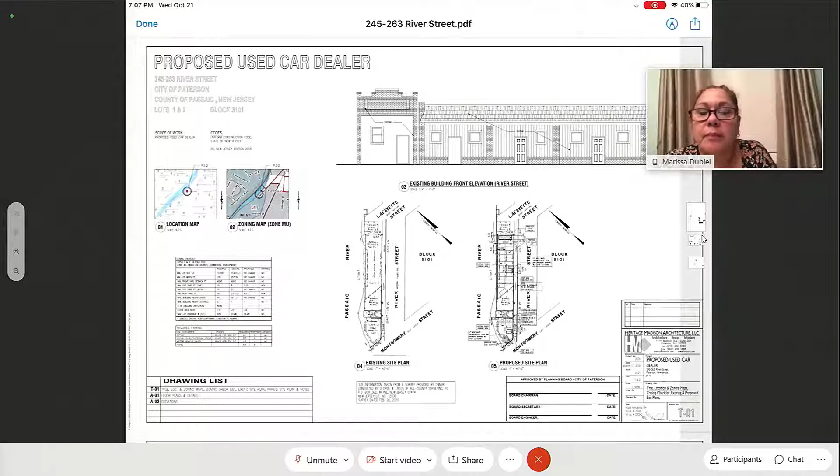How about now? Yes. Okay. Please, so I'm going to zoom into the existing site plan.

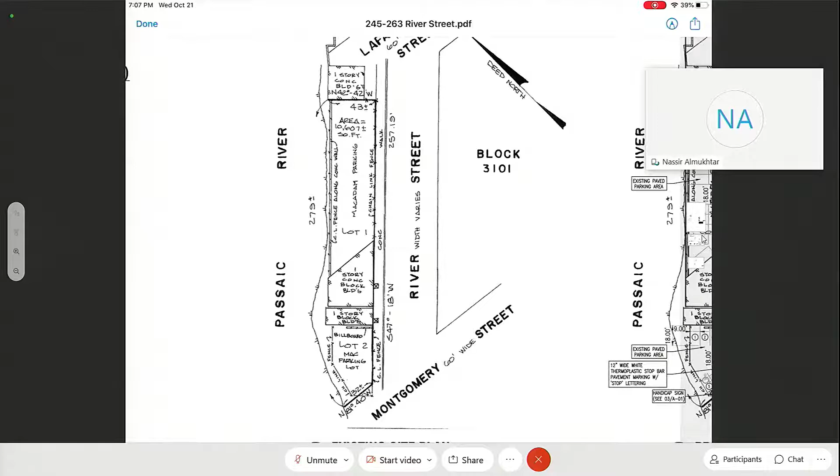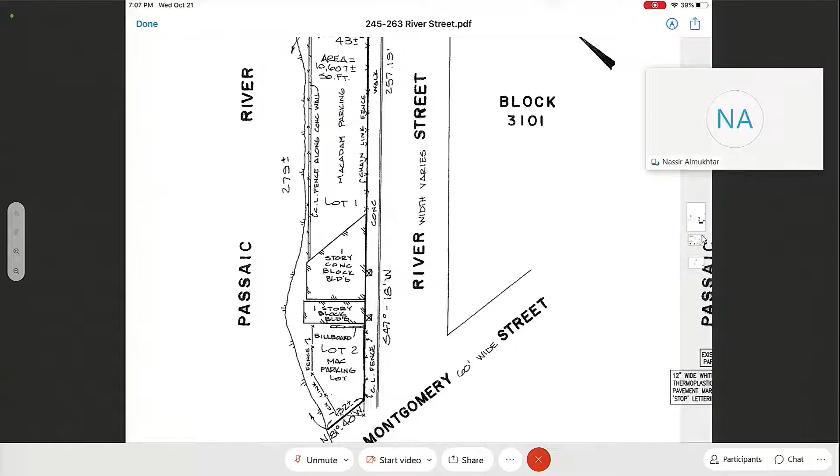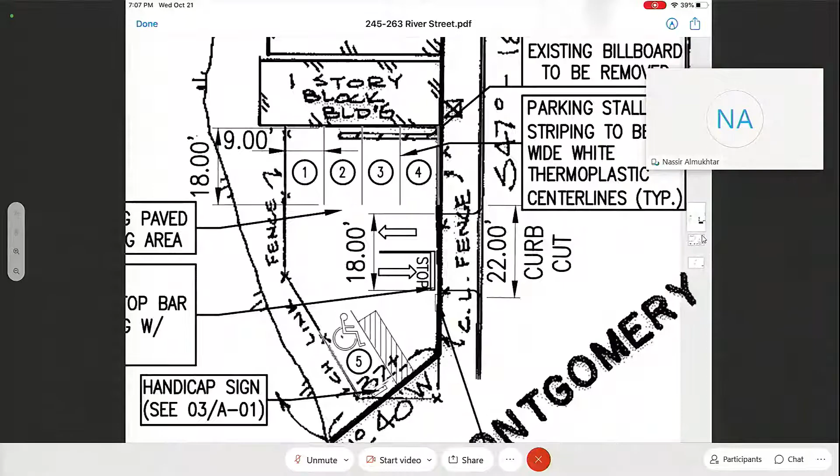This is the existing site plan. There's a billboard, and there's no curb cut to the south of the existing structure, the one-story block building. So we're proposing to provide a curb cut there and turn that space into a parking lot. This parking lot is indicated on this drawing, which would contain parking space number 5 for the handicap, and then to the north of that we have spaces 1, 2, 3, 4, and there would be a 22-foot wide curb cut there.

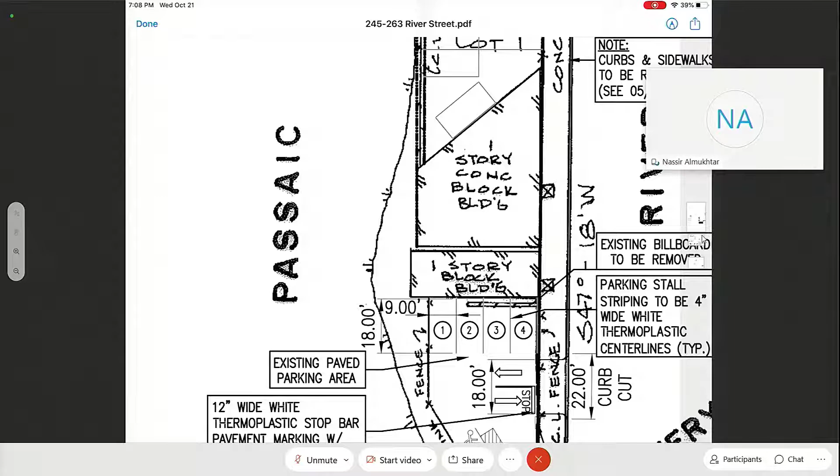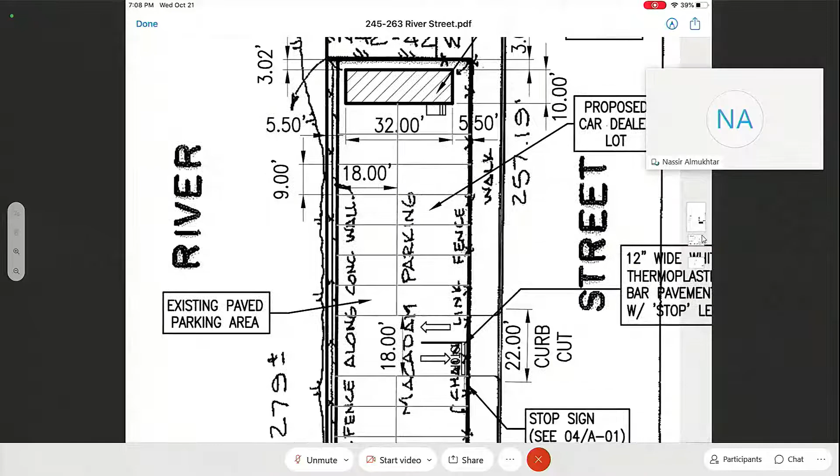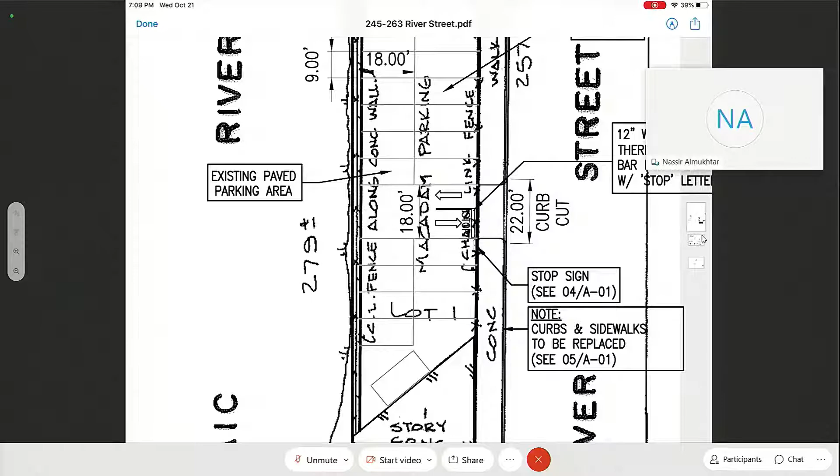This is the one-story existing structure here. In a minute I will turn the page and show you the interior layout of those structures. However, to the north of that, we're proposing a used car dealership that would contain a 10 by 32 foot trailer all the way to the north. And then south of that, we will have 21 spaces allocated to the exhibition of the used cars, or for customers, organized as required and as needed. There's also, to the proposed car dealership, another curb cut off of River Street that would be 22-feet wide, 2-way in and out.

Above that, there's the existing structure. Those are the elevations of the existing structure, as Mr. Bush has described it: brick and stucco, and then vertical wood siding that's painted. On the right side is the social club that we mentioned, and then a bit to the left is the existing open space that I don't believe is occupied at this time, but it would be rented. And to the left of that also, there's that storage space that I alluded to earlier.

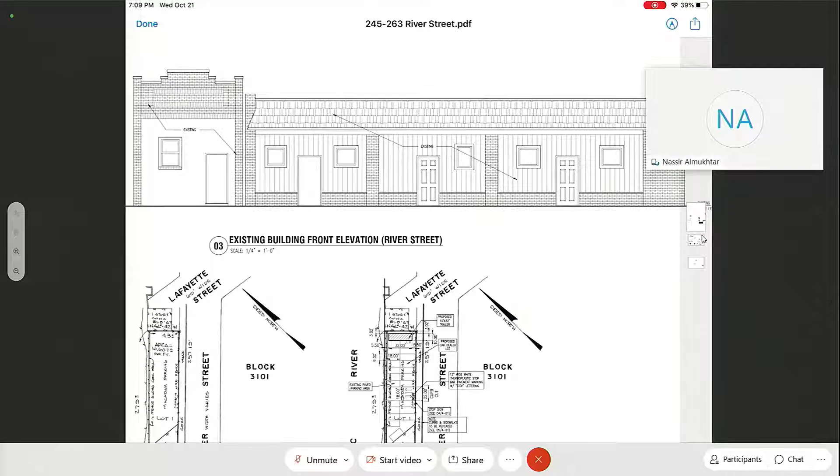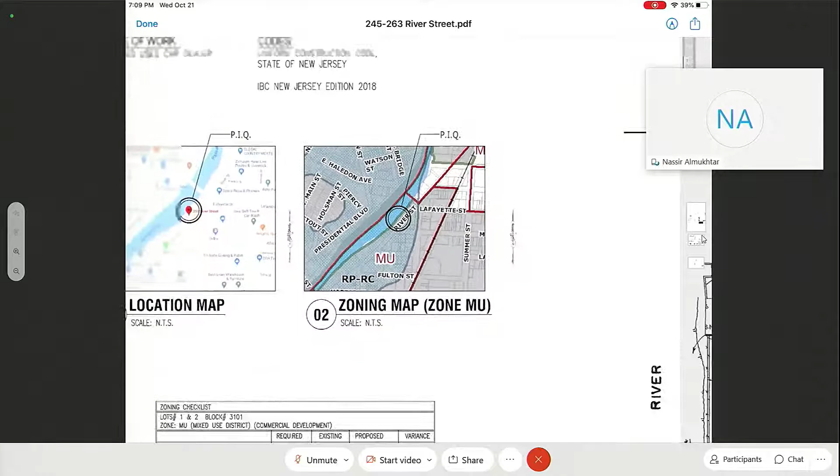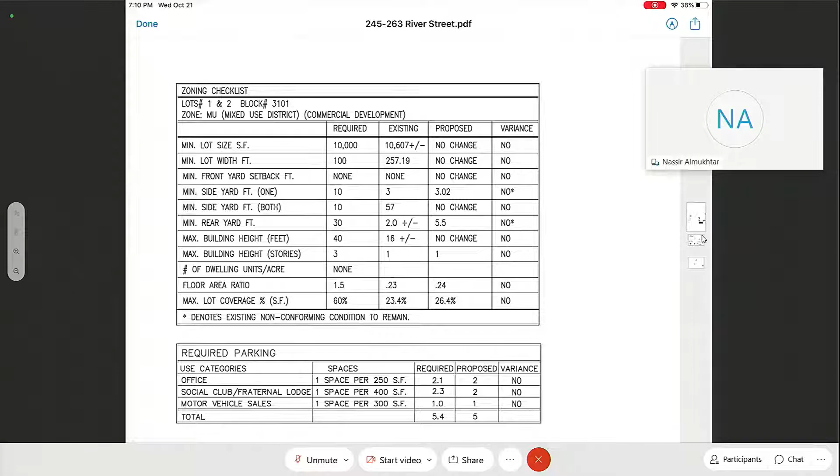Okay. Does that conclude your testimony? I can briefly describe the interior layouts, if you like. Yes, please. Sure. So I'm zooming into the existing structure.

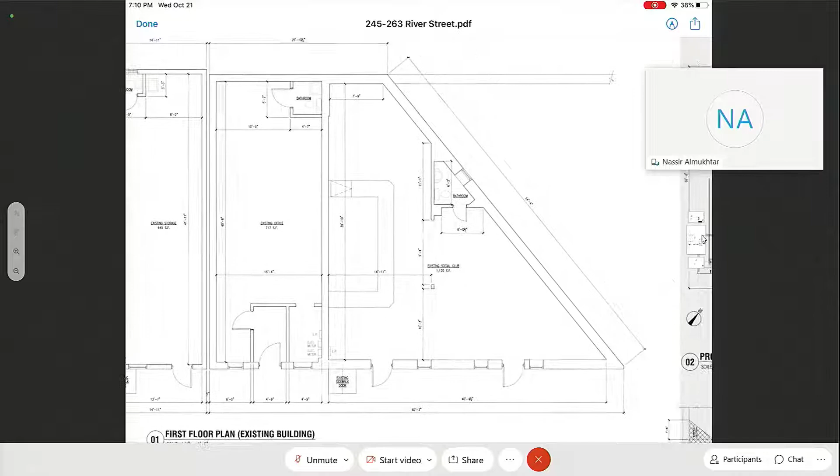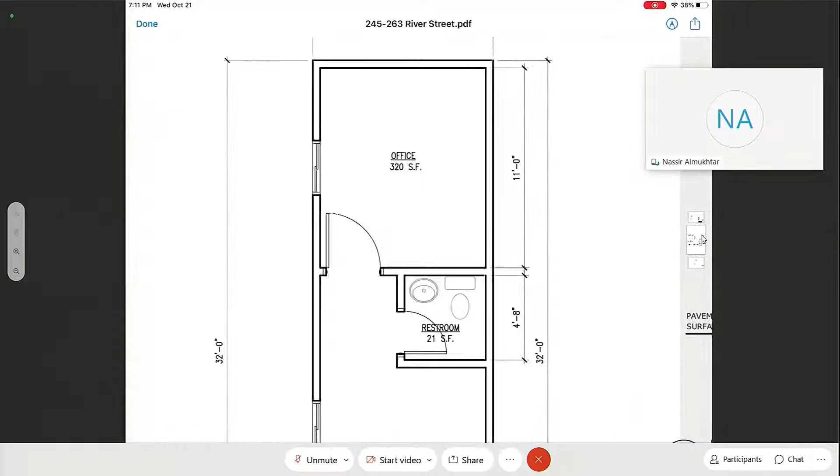There's a storage space, then an office space, and then a social club. And this is the proposed trailer for the used car dealership: 320 square feet, 10 foot wide by 32 foot deep. The office is actually 110 — that was a typo, the entire trailer is 320, not just the office. So it's just an office space, a restroom, and a waiting area for customers.

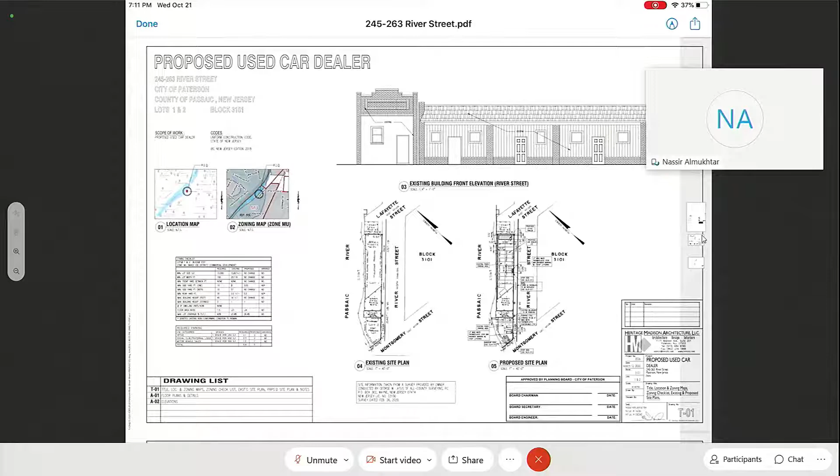And some site details, existing elevations and the proposed elevation for the trailer. As far as what Mr. Deutsch's report requires, the security cameras and the lighting plan, we definitely agree to that, and we will submit that subject to his approval or the engineer's approval. And that concludes, Mr. Chairman. Okay.

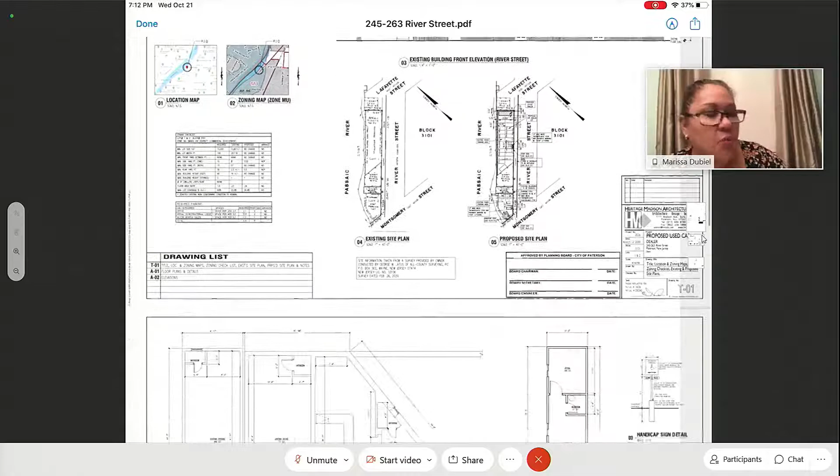Mr. Almukhtar, I just want to confirm, I'm looking at your plan. The three existing spaces already have bathrooms that pre-exist, correct? Yes, that's right. And that includes a storage space, correct? Yes.

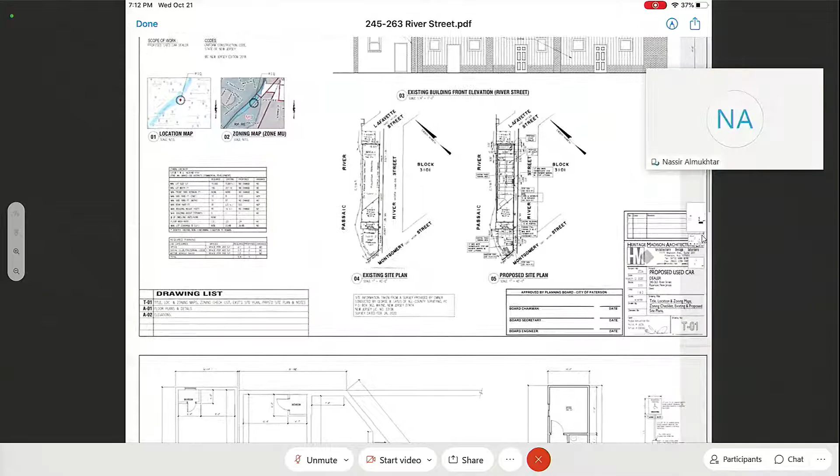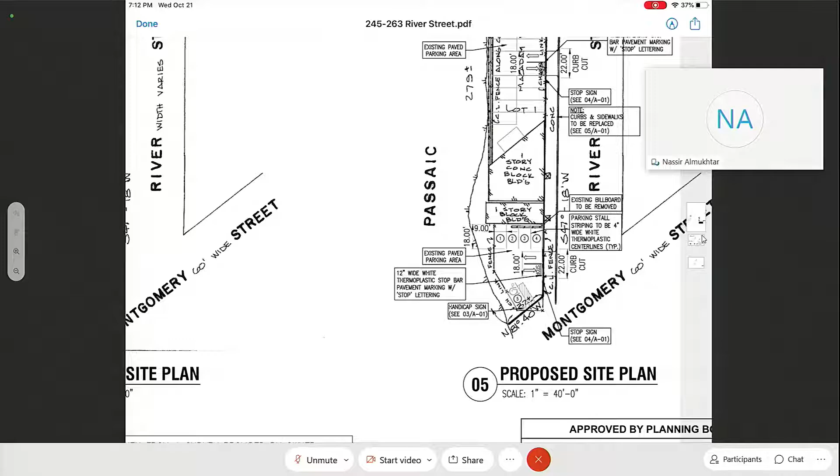Okay, and there was a question about the placement of the recycling and refuse containers. Can you please elaborate on that for the board? Yes, we are located just north of the social club. I can move the parking spot that's on an angle, just located there, north of the social club, towards the rear. Obviously, I will update my plans and revise to reflect that location.

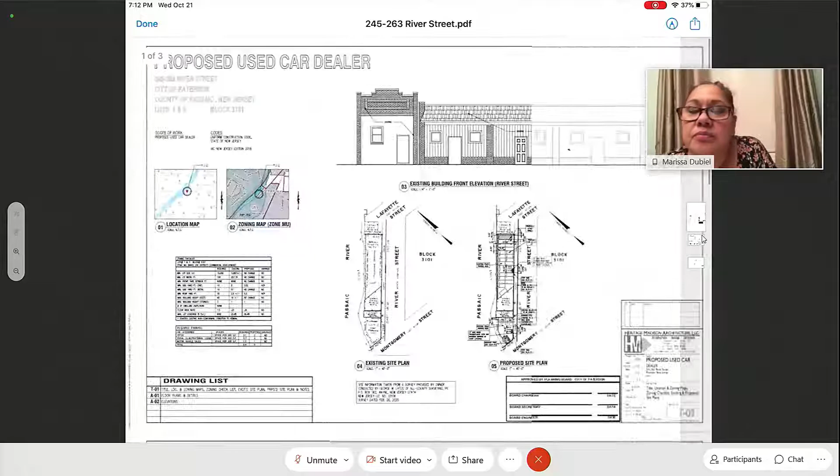So I would like to open any questions to the board for my witness. Yes, but first I'm going to ask you, for the sake of time, to call your next witness, since he is the owner, and then I'll open it to the public so they can question both. They'll have a question for either one, and then our commissioners will ask questions as well.

Okay, so do you want to ask Mr. Dandis? Yes, hi. Hello. Hold on one second, please. Please raise your right hand, sir. You swear or affirm the testimony you're about to give is the truth, the whole truth, and nothing but the truth? Yes, I do. State your full name for the record. My name is Abdul Muin Dandis.

Thank you, Mr. Dandis. Okay, can you explain to the board who your target customer is for this used car lot?

Mr. Dandis is breaking up. I understand, I didn't know. Oh, okay.

Mr. Dandis? Hi, did you get the question? Who is the target user for this used car lot? Most of the target users, the customers, will be mostly wholesale business and some internet clients. The used car dealer business today is based on the internet, not walk-in customers. So we expect that location will sell 2 to 3 cars retail per month, and the rest will be wholesale. Your target audience is online?

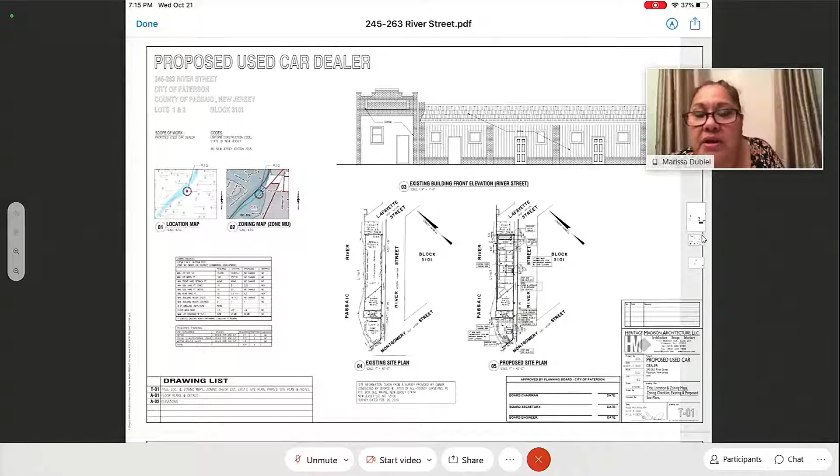Yes. Okay, and you are not expecting, nor planning to have any parking on River Street? No, not at all. So the amount of parking spaces that you are allotting for each lot, you expect that to be sufficient to serve the customers and the retailers? Yes, I do.

And you've been in the business of used car dealership in the past, Mr. Dandis? Yes. You have been before the board for other used car lots before? Yes. You have experience, and those dealerships run similar to the one you're running here? Yes. Okay, that's all the questions I have.

Okay, at this moment I'm going to open it up to the public first. I'm going to ask if anyone from the public has any questions of the architect or Mr. Dandis to please call in at 973-321-1579, and the meeting ID number is 711-680-0071. I will give 2 minutes for call-ins and 3 minutes for questions. Thank you.

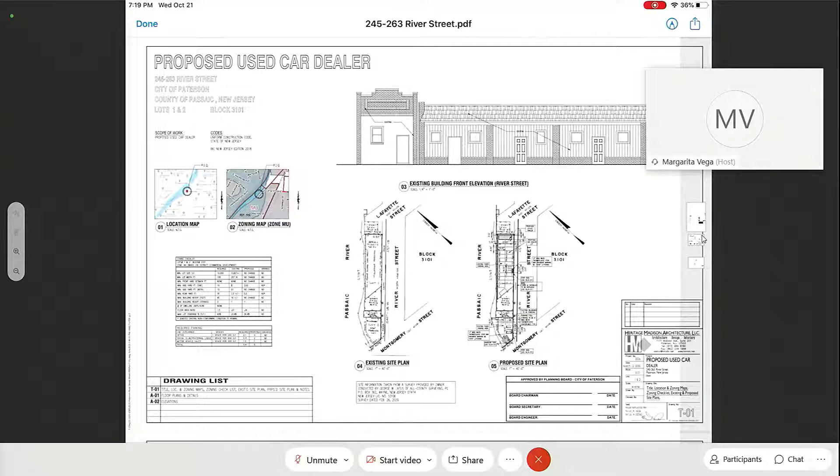We do have one caller. All right, Maggie, you just broke up, I didn't hear it. You only have one caller now? No, I do have a caller, I'm trying to connect, we had to have him call back in. It is Mr. Michael Jackson, I think from Clinton Street, I'm not sure exactly, but he will be on in 1 minute. Is this the councilman? I did not ask that, it's an interested party, someone from a residence. Okay, thank you.

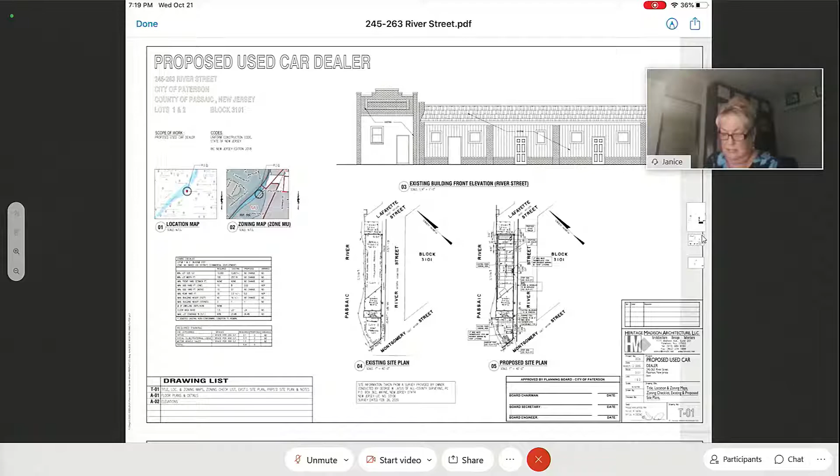Madam Chair, can we remove the plans? I want to see the faces, please. I'd have to ask the architect to take them down. Thank you.

He's almost done, ma'am, please look.

Mr. Michael Jackson, are you there, sir? I'm here. Madam Chair, yes, your question please? First, what is your address for the record? My address is 227 Clinton Street.

Does Linda have to swear him in at any time? That's what she's just asking, a question. I didn't hear the last statement, can you repeat that please?

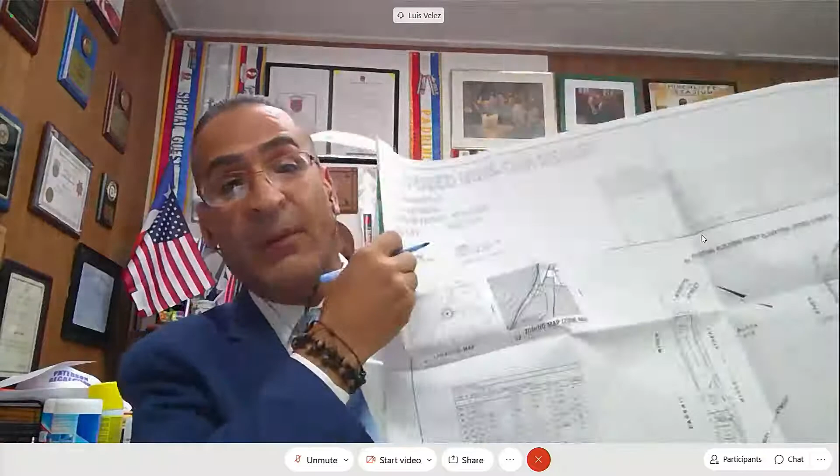Now, if he could put the cars the same way, I'm seeing it here in this plan I had. Before he speaks, I'll be looking at the plan up and down. I'm counting, if he's going to put the cars one after the other, that is hard, it's difficult to maneuver cars in there. Where is he going to put the cars when he has to put 5 cars in the back and the front is blocking? Let's be realistic, the intention is probably good, he wants to do business in the city of Paterson, but it's too big for the area he wants to construct.

Madam Chair, can I ask a question? I think the attorney, excuse me, yes, Commissioner Brooks, let the attorney speak first. The attorney, Mr. Bial, you were going to say something.

Yes, despite the fact that there is no parking variance, there are other used car lots in the immediate vicinity that have the exact same setup as this one. And there is one, less than a mile away, right on Straight Street.

And, Ms. Rose, can you mute yourself, please? Now, excuse me, Councilman, Mr. Bial is speaking, and then Ms. Brooks wants to ask a quick question. Okay, so Mr. Bial, please finish.

It's a very heavily traveled road. I take that road every day, to and from home. And people understand you can't park on Straight Street there. And there isn't a lot of congestion going in and out of the parking lot. And there's very little room in that particular parking lot. The plan that my client is intending here conforms with everything else that's going on in the neighborhood.